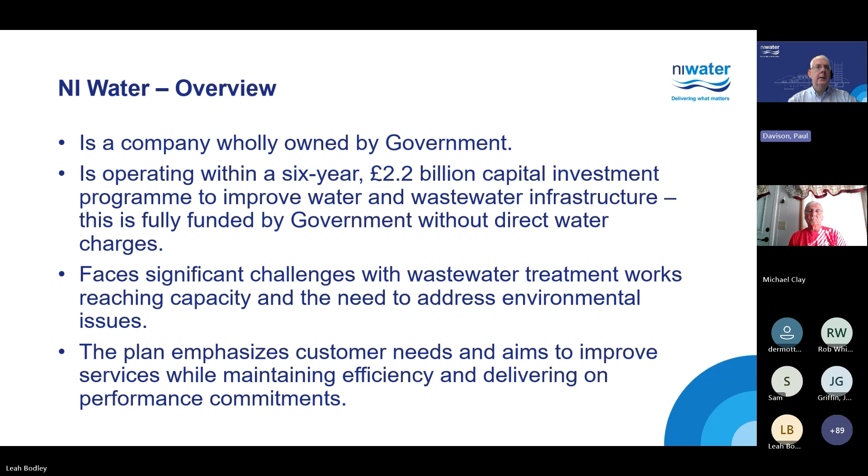Okay, I can see my slides now just by moving myself. Anyway, sorry. Okay, good afternoon, everyone, and my name is Paul Davison from Northern Ireland Water. I'm Head of Wastewater Strategy. I suppose where we're coming from here is the major challenges that our industry is being hit with, economically, politically, and environmentally. And if we continue the way we've always done it, we will always just get what we've always got. So we have to think outside the box, and we need a paradigm shift in our industry to be able to deal with all of these political, economic, and environmental challenges that we're having.

So Northern Ireland Water is a wholly owned company owned by the government. It has a 6-year investment plan, very similar to the investment plans in England and Wales. At the minute, we're going through our PC21 plan, which is a 2.2 billion pound investment in water and wastewater infrastructure. All of our funding is coming via government, so we have no water charges.

So we face very significant challenges from wastewater treatment, capacity, and also addressing environmental needs. Our ultimate objective here is to be able to improve the service while maintaining efficiency and delivering on the performance commitments.

In terms of wastewater treatment, we're looking for compliance within the regulated Water Order Consent, and that's mainly sanitary, but also bringing in flow compliance into that as well. We also then have got a capacity issue that a number of our treatment works are over their headroom, and to meet growth, these works then are overloaded. We are limited in terms of capital expenditure, CapEx, and we're also constrained in terms of our OpEx, our operational costs. We also then have very challenging carbon footprint challenges as well. And we're looking to see, can we reduce the transportation and disposal of sludge from our wastewater treatment works, as one of our incinerators is coming near the end of its working life.

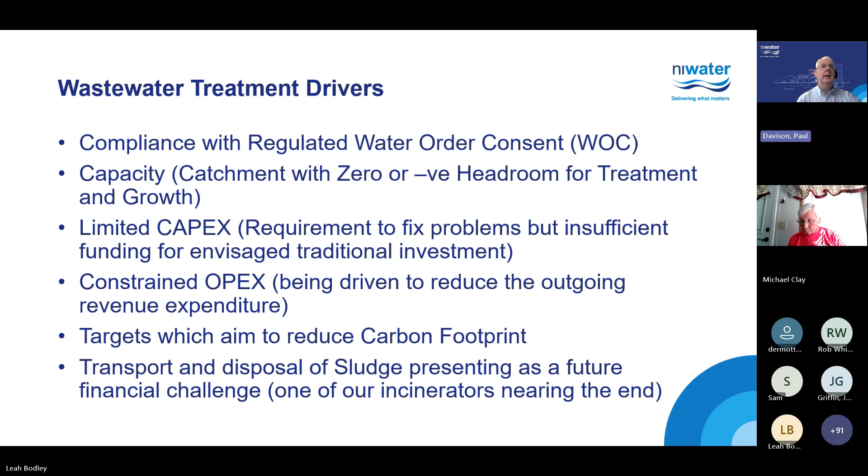So the knowledge sharing that we would like to try and achieve here is to be involved in new and innovative processes in the industry to be able to meet the challenges and the constraints going forward. In the past, and we're presently doing this, we're optimizing the physical aspects of a wastewater treatment works, and we have saw some benefits from that. What we're looking now, we're working with the ABS team, can we optimize the biology of a wastewater treatment works and then see further improvements in the performance of that asset. The ABS team will be able to give more details on how they've been able to achieve that working with Northern Ireland Water.

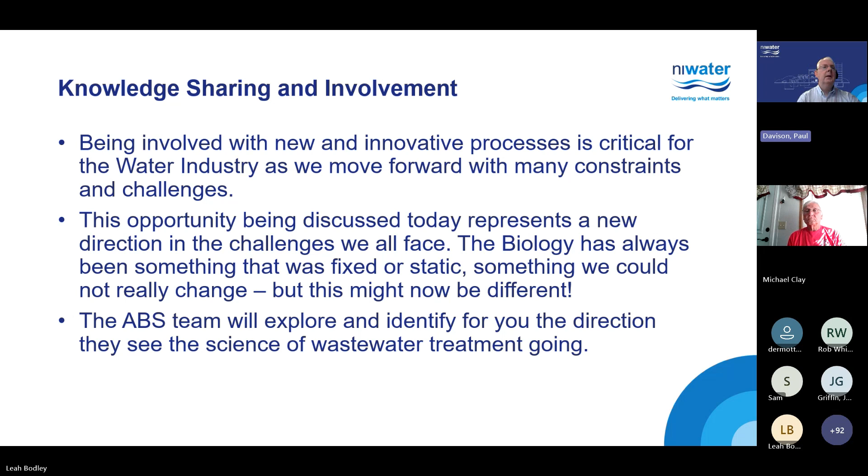Okay, so one of the areas that we've been working with ABS is on our sludge production, and maybe Northern Ireland Water is slightly different to the rest of the UK, in that we don't do any biomethane production, so no anaerobic digesters in any of our facilities.

All of our sludge is thickened, dewatered, and transported to two incinerators in Belfast, where it is burned. So we're looking to see if there's any way we can reduce the quantity of sludge we're producing, so we've got less cost in terms of dewatering, thickening, less transport costs, and less combustion costs of burning that waste as well.

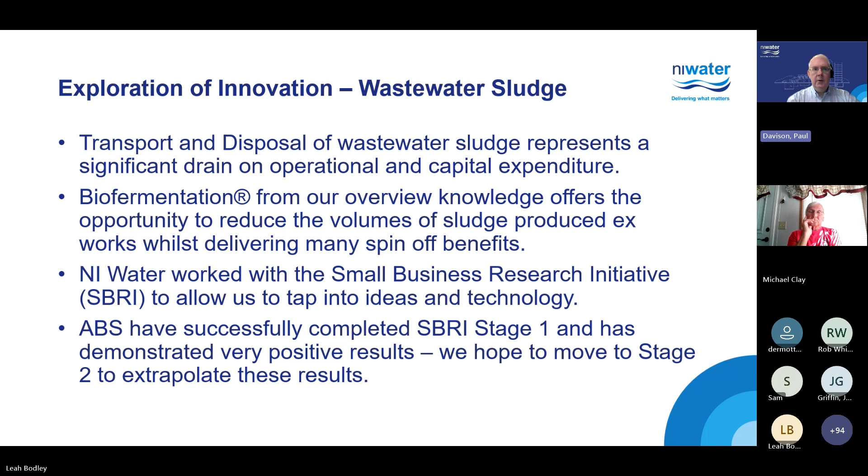Through the SBRI initiative, that's a small business research initiative, we've been able to tap into some of these ideas. ABS were successful in completing stage 1 of that approach and have demonstrated very positive results in terms of sludge reduction, and we are in the process of seeking further investment to take this to stage 2 implementation.

I think that's the end of my slides, and now I'll hand over to John Griffin, who will go into more detail on some of the work we've done with ABS in the past. Thank you, Paul.

Thank you, Paul. I'm John Griffin, and I'm currently one of the project sponsors in Northern Ireland Water, responsible at the moment for sewage and wastewater pumping station upgrades. However, in a previous role, I was responsible for managing Dungannon Wastewater Treatment Works emergency measures, which was our first experience of working with ABS and of biofermentation in particular. I was also the project manager for the biofermentation pilot project.

Dungannon Wastewater Treatment Works was designed for an original population of 65,000, and approximately 60% of its influent is from trade sources. In fact, the largest trader on their own accounts for over 30% of the plant's loading. The three largest traders are all meat producers. So as you can expect, this can have a significant impact on the loading of the plant, even though they have pre-treatment.

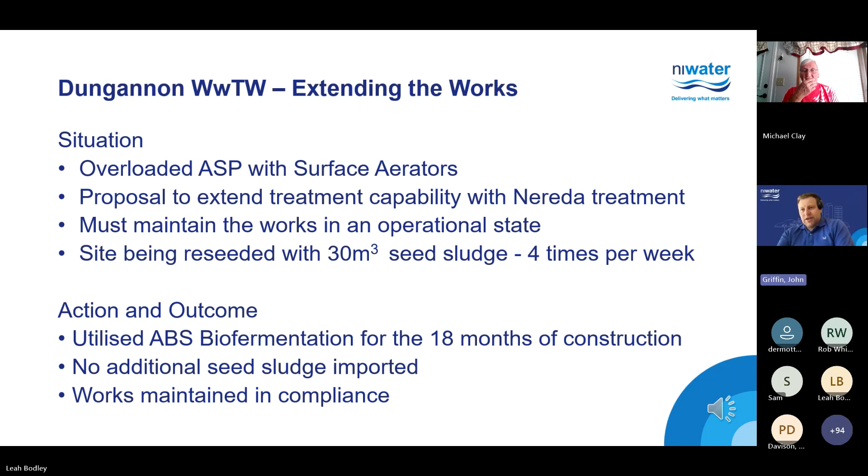In order to bring the works back online, we looked at a plethora of options, one of which was biofermentation. Ultimately, we knew we needed to provide significant additional secondary treatment, and we decided that Nereda was our preferred solution for the long term. So we brought ABS on board with an 18-month contract to provide us with biofermentation. During that period, we did not bring any additional seed sludge in from other sites, and we were able to return the works to compliance, particularly with ammonia.

The trial at Dungannon was part of a significant number of changes which all occurred at the same time, but we needed to do all of them to bring the works into compliance. We knew that biofermentation had contributed something to turning the works around, but we did not know the extent.

So, seeing the potential for this technology, we conducted a full pilot project and selected 5 sites. Omagh was an activated sludge plant having sludge management problems due to imports. Moy, an oxidation ditch with no storm management but, similar to Dungannon, had significant trade loading - in this case from apple processing. Killygonlan was a package aeration plant with no storm management and suffering from high infiltration.

Fivemiletown was a rotating biological contactor which suffered from rogue trade with very high biological content. Lastly, Limavady, which was a relatively new plant with no issues, was our base site, our control works. However, there was maintenance carried out on one of the lanes while we were completing the project.

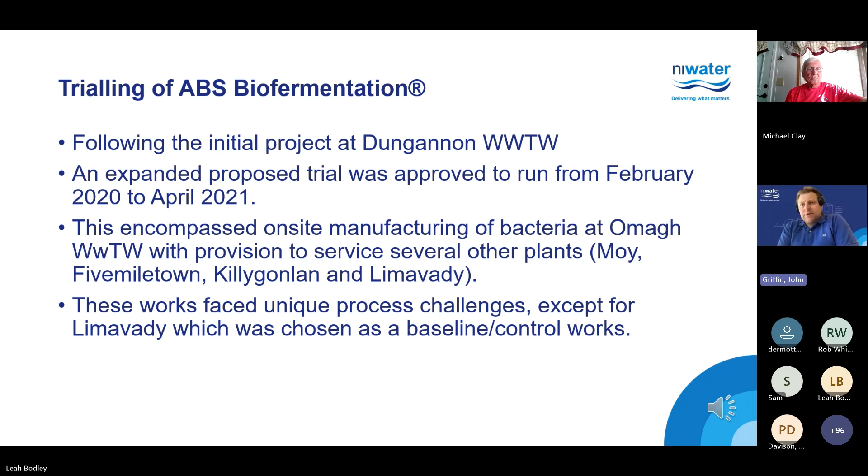We noticed a significant improvement across all sites. Killygonlan was still subject to high flows, but its recovery was a lot faster after washout than it would have been without biofermentation. Fivemiletown was our biggest surprise - biofermentation provided an unequivocal improvement on the performance of the works.

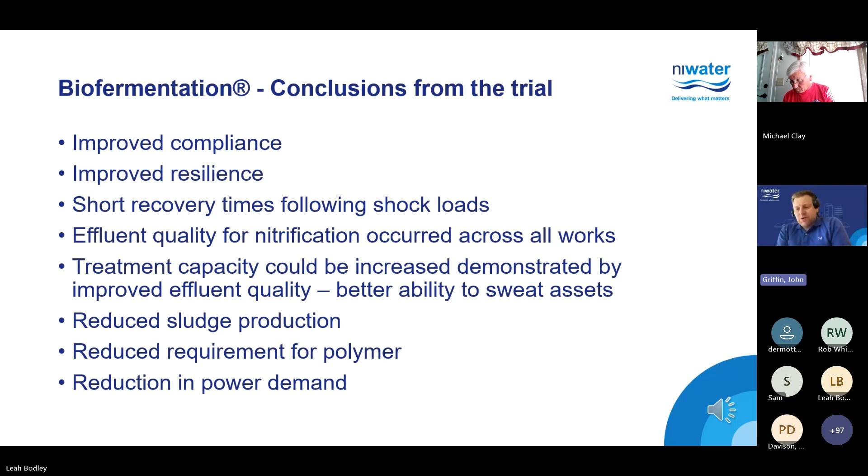Overall, we noticed improved compliance and more resilience. We had works that could recover quicker from shock loads. We used less power, had less sludge production, and less chemical use. Overall, we noticed that the effluent on all sites was excellent, and that the biological performance was to a nitrification quality.

As it was a pilot project, a report was produced and signed off by the head of scientific services within Northern Ireland Water and myself. We wouldn't have put our names to it if we weren't happy to endorse it, and we are very happy to share it with other companies within the UK water industry.

But going forward, we know we need to do a trial at a larger works. We need to get more data so that we can do a more detailed cost benefit analysis to work out the economics. Both of the projects we did were provided under CapEx with no OpEx. We need to work out a methodology which is available for CapEx to provide the plant and ensure that we've got the operational capital to be able to run it.

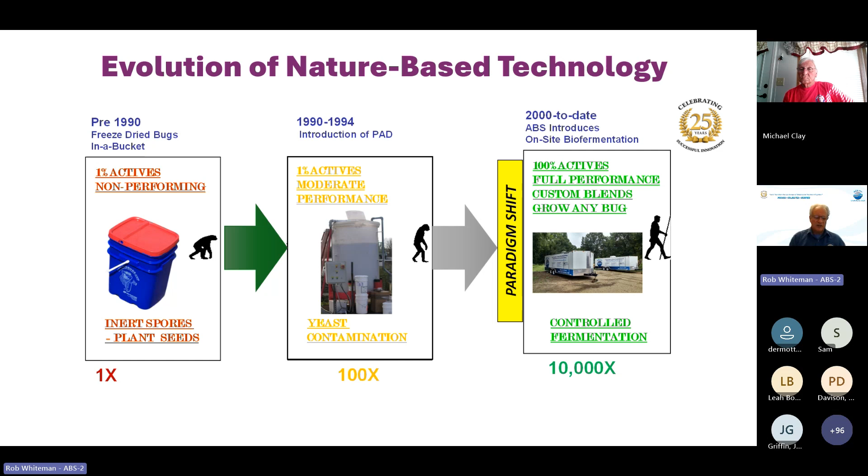Eventually, around 2000, we were troubleshooting a plant suffering from filamentous bulking in the pulp and paper industry, and biofermentation was born. This grows the microbes on site, delivering 100% actives, full performance. We can make custom blends, grow any microbe, and provide controlled fermentation, allowing us to deliver 10,000 times more than previously possible into the existing plant. This has allowed us to create a microbial population shift in the biology, which has created a paradigm shift in our thinking.

So if we look at the generations in the last 25 years, you may have noticed in the top right, we are celebrating 25 years of successful innovation in technology. We started out in industrial, filing our first patents on the process, and were able to get compliance within 10 days on plants treating 160 megaliters a day, or 40 million gallons a day for Americans. The second generation was around 2007, 2008. We started exploring the municipal sector in the United States to control filamentous bulking and noticed reduced sludge production. That's when we first went to the City of Dublin and started working with them.

The third generation, we worked with Carl Gerald at Stark, where we'd already demonstrated sludge reduction in the aeration basin, getting results of 60 to 70% reduction. Carl asked us, could we work in his aerobic digester? We said, we don't know. We tried it and it worked. Carl went about 5 years without hauling sludge, and we have another client that's gone 6 years now.

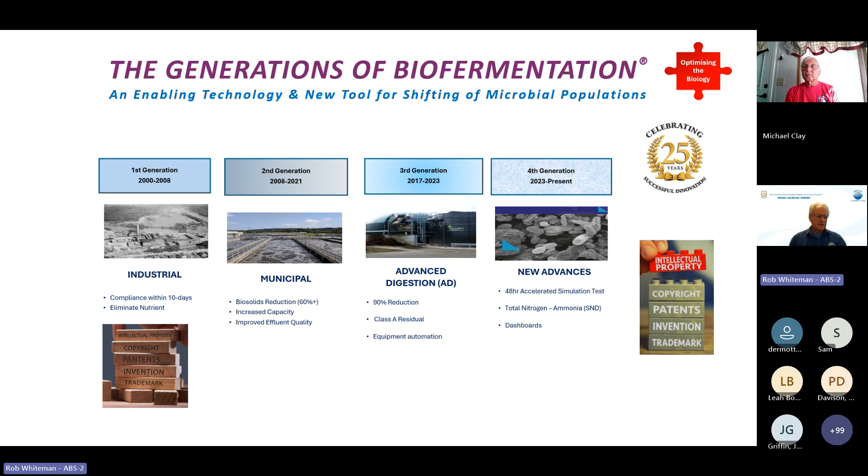Then the fourth generation, in the last couple of years, we developed the accelerated simulation test, which can demonstrate improved settleability, and I'll show you an example of that, and expanded our patent portfolio. So that is the generations of biofermentation over the last 25 years.

So why would you grow organisms on the outside of a plant and not try to grow them on the inside? Well, if you look at environmental engineering, the whole basis of our training is to grow the microbiology in situ. And this creates a disconnect between environmental engineering and microbiology.

Basically, in situ growth, we drive the mass, so we increase the mass through increased activity. This creates undesirable byproducts, poor settleability, because as we drive the mass, we increase our solids retention time or mean cell residence time. By growing the microbes ex situ, we can deliver a huge amount of viability of non-pathogenic bacteria, which allows us to drive floc structure, non-filamentous material, improve settleability, and improve activity.

And again, mass is not necessarily driving viability. It is simply driving activity by increasing the mass. So we're actually able to get a lot more activity by driving viability of the biomass.

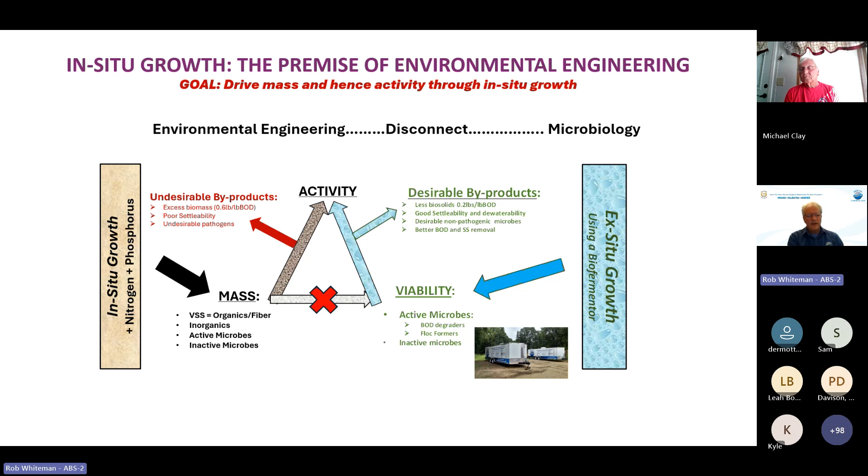So why do we need probiotics? Bottom left, we see Eikelboom, who was one of the people that really started to study the microbiology on the scope and came up with a filamentous ID grid. And this was followed by David Jenkins in the United States, who also did the same over here.

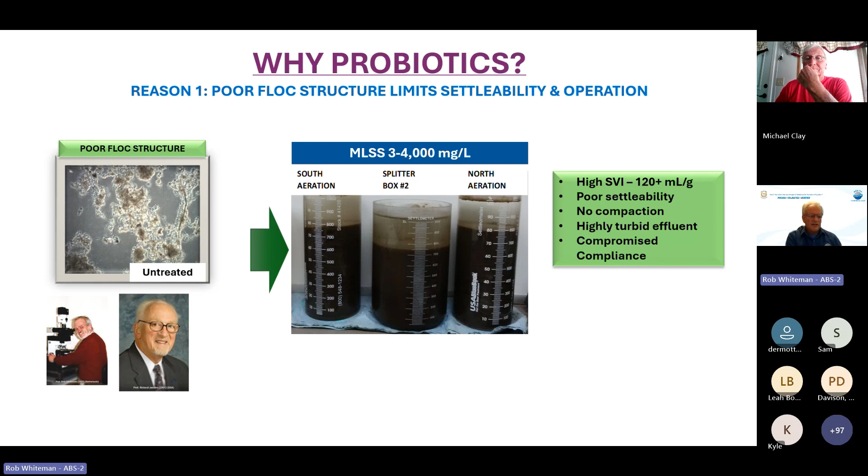And what we see in that slide is basically poor, open, weak floc structure with some filaments. Basically, this leads to poor settleability and operational challenges in a system. So this leads to high SVI, sludge volume index, which can be greater than 120, poor settleability, no compaction, high effluent turbidity, and basically compromised compliance because we have small fines going out in the effluent.

So how does it limit the operation? Basically, poor settleability. The operator has a choice. He can either lower his mixed liquor so that he can get better settleability because there's less solids in solution, or as environmental engineers, we would look at the system and say, well, it doesn't have enough clarifier capacity. Let's build some more clarifiers, and that adds CapEx and OpEx. And by the way, when the operator lowers his mixed liquor, he's creating higher OpEx because we're wasting more out of the existing plant.

The alternative solution is to look at using probiotics to create a microbial population shift, allowing a longer mean cell residence time.

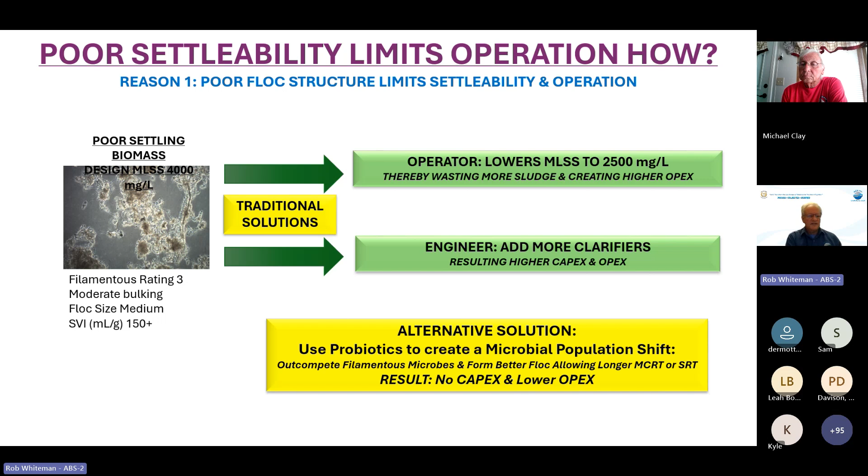The other thing is cleaners and household detergents weren't around before the 1930s. And since COVID, hand sanitizers have come in. So if you go back to the original paper of Ardern and Lockett, they actually talk about sieving the sludge through a metal sieve, not through a 1.5 micron filter paper, which indicates that the sludge size was probably quite a bit bigger. And I think that over the last 100 years, if we had the data, we'd find that the settleability and floc structure has been seriously compromised by the kind of wastewater that we now have. And of course, all these are now becoming emerging contaminants of concern.

Reason 3, aging of the sludge decreases the viability. It's like making an old people's home. Here on the left, we see trailers that typically our biofermentation units come in, and these are called Model 1500s. On the right is the typical floc structure.

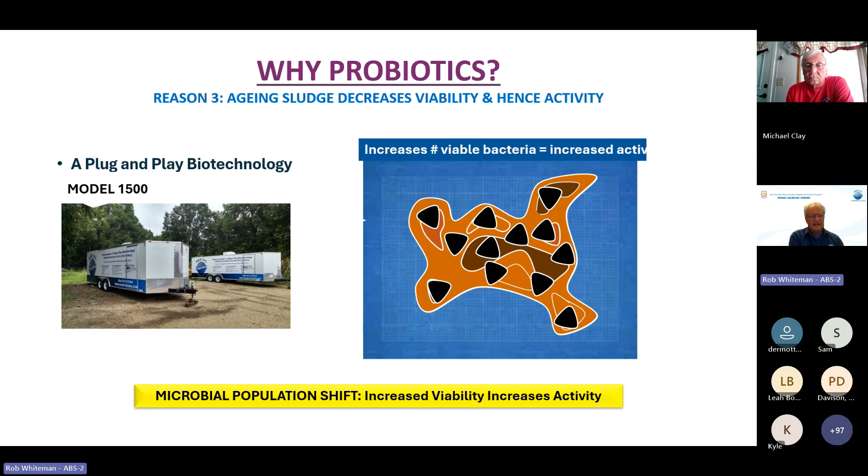So what is the impact on activated sludge? Well, we put the biofermentation system online as a full turnkey service. First thing we're going to see is improved settleability and compaction and a reduction in the filamentous. The impact of that is to improve the effluent quality, as John talked about, that he's seen in his projects in Northern Ireland, ensuring compliance.

Third thing is, if the operator wishes, he can then start to increase his mass to increase his process capacity. And then the fourth thing is, the better settling sludge, the more hydraulics you can get through the works, particularly a secondary treatment system, assuming there's no piping limitations.

Then you see improved dewaterability, reduced polymer usage. You see a reduction in the amount of solids produced, usually by about 30% if it's not optimized, up to 60 or 70%, and the operator controls that process. Finally, we have also noticed about a 25% reduction in electrical usage where VFDs and diffused air are used.

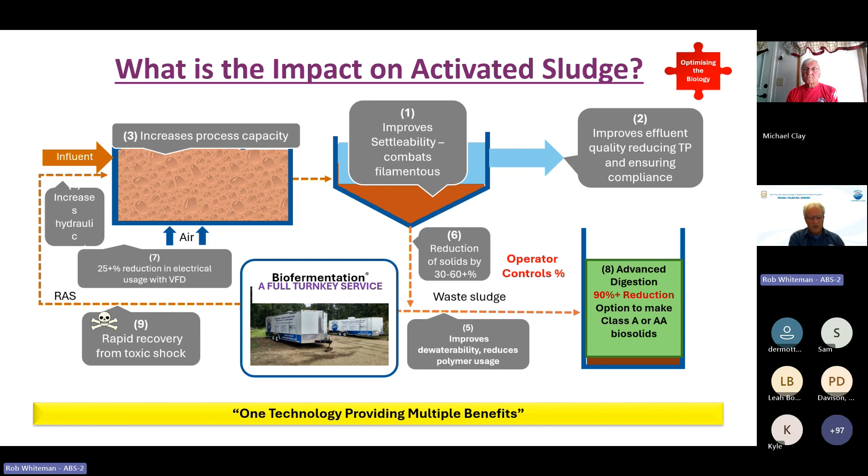And then finally, what we mentioned earlier, development of the process of advanced digestion to continue digesting the sludge further. And we've seen the ability to reduce the sludge make by 90% and also make what's called a Class A or AA biosolids in the United States, which is a low pathogen sludge. And then finally, what it was developed for originally, which was rapid recovery from toxic shock. And you can't separate out any of these benefits. If the technology is applied, you get all of these benefits by optimizing the biology.

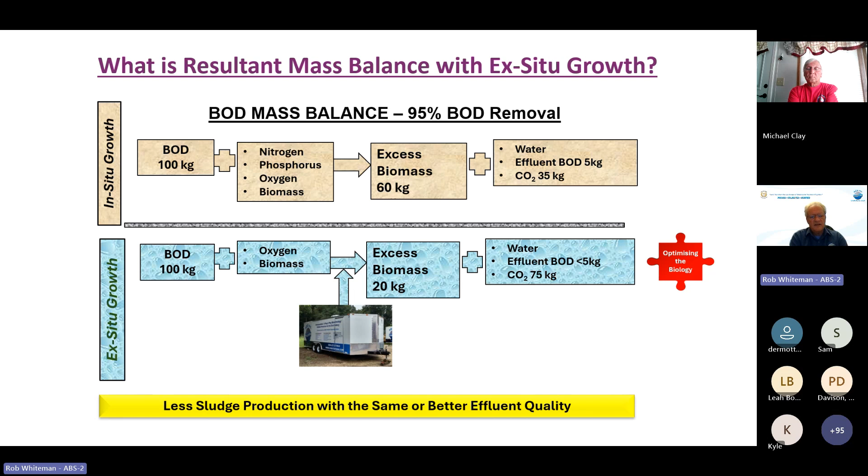So if we look at the mass balance for a plant that's doing 95% BOD removal, for every 100 kilos of BOD going in, you provide nitrogen, phosphorus, oxygen, and biomass to start the reaction. We get about 60 kilos of excess biomass from that plant, 5 kilos in the effluent, the rest goes to CO2. If we use ex situ growth we see that drop to about 20 kilos of excess biomass, less than 5 kilos of effluent BOD, with the balance going to carbon dioxide.

So why would we even consider this process? Well, pollution prevention hierarchy by DEFRA or EPA, they're both the same, with respect to sludge disposal, requires us as environmental stewards to look at source reduction. However, the industry has been very focused on disposal methods, landfill, pelletization, incineration, volume and mass reduction through aerobic or anaerobic digestion, energy recovery through anaerobic digestion, and beneficial reuse on land application.

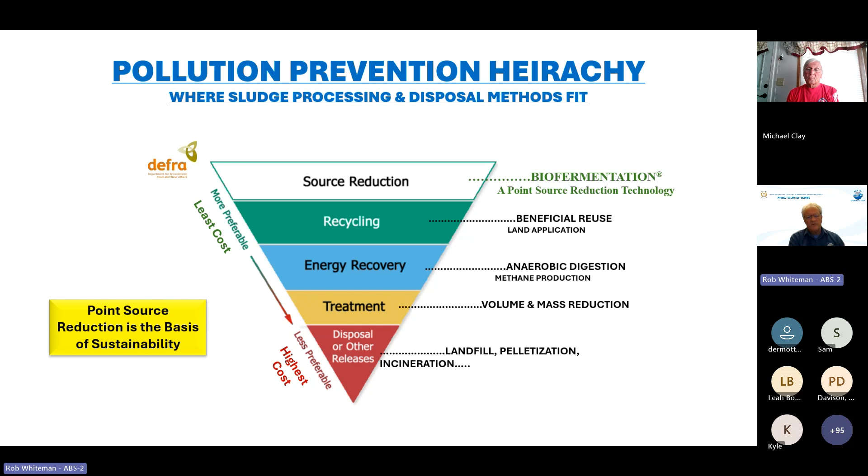But biofermentation is really the only point source reduction technology, which is what we call it. And that is the basis of sustainability for any kind of program moving forward. We have to look at source reduction technology.

In terms of the evidence of cause and effects of probiotics on a waste treatment plant, this is part of a 5-year study from Port St. Lucie. The blue dots are before and the black dots are during the use of the probiotics. And this is food to microorganism ratio on the x-axis versus kilos of sludge produced per kilo of BOD removed to normalize the data. And you see that it doesn't matter where we operate on the F/M curve, because a lot of engineers criticized us because we would increase the mixed liquor. And so they argued we would change the F/M and therefore not really reduce biosludge make. If you look at the data, we determined that that was not true during the study.

And if you look at the R squared around the fitted curve on these graphs, R squared means how closely it fits to that curve. With biofermentation, we had an R squared shift to 0.96, which I'd never seen in wastewater. That basically means you can rely on the fitted curve plus or minus 4% or so in your accuracy, which allows engineers to design things more accurately, whereas with the blue dots before, the accuracy was only about 0.45, which would be about plus or minus 55%. And sludge reduction occurred irrespective of the actual F/M. And we've seen since that biofermentation always improves the R squared.

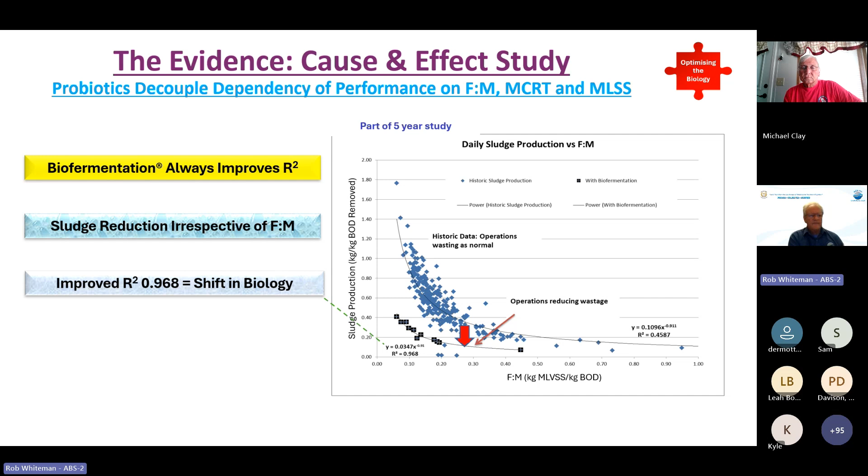So if we look at classical sludge processing and the net zero carbon challenge for the UK, a lot of plants have primary sludge make, etc. And sludge production, as mentioned earlier, is 0.6 kilos per kilo BOD removed. Although I noticed I've still got pounds in here.

We have all sorts of methods of decreasing that mass initially, either through anaerobic digestion or aerobic digestion. A problem with anaerobic digestion is we're finding we get return filtrate that's high in ammonia and phosphorus back to the front end of the plant, and then we have to treat that all over again. We're recovering about 50% of the methane in terms of energy recovery before we go to volume reduction using either presses or centrifuges.

And then if we look at disposal methods, we have options of land application, landfill, which is certainly very expensive in the United States. I'm sure it's very expensive in the UK. Incineration, which is costly in terms of capital. And we're looking heavily here at composting and pelletization to sell sludge into the consumer market.

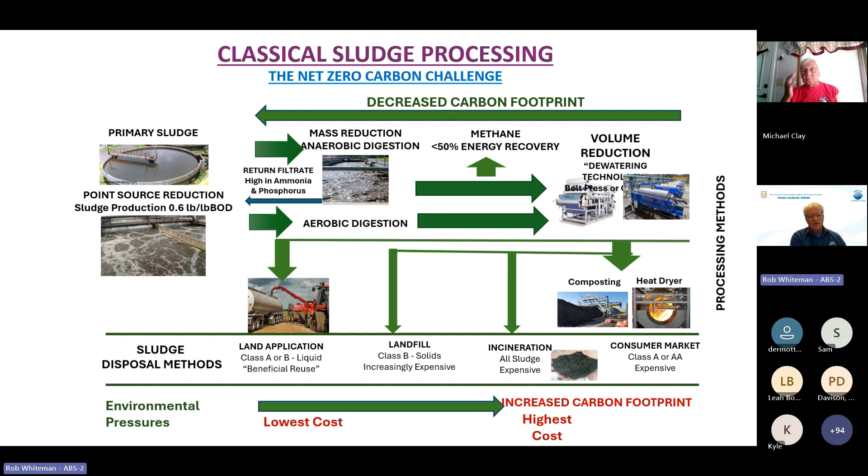But the reality is there's so much sludge to be dealt with, not all these disposal methods can handle it. And each one of them, as we go forth into incineration, etc., all increase the carbon footprint and all increase the cost. So with a paradigm shift in thinking, what happens if we took the ultimate system and optimized the biology?

First of all, we would probably convert the primary clarifiers to anoxic or anaerobic zones so we could get total nitrogen removal. We would treat the aeration basin going to 0.2 instead of 0.6 pounds or kilos, whichever you want, per kilo or pound of BOD removed. That would have a serious effect on all the downstream processing equipment and requirement for that.

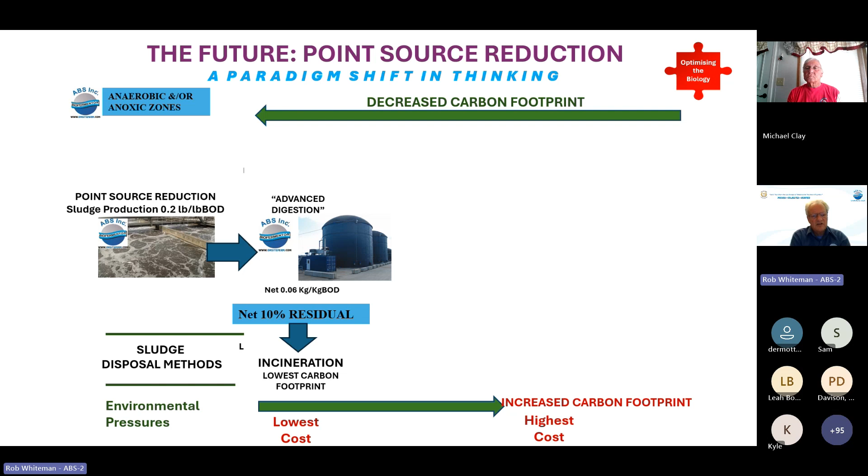And if we added advanced digestion, where we could actually get a net 10% residual by removing 90% of the sludge completely, incineration would become a lot more cost effective. And in fact, this whole process would decrease the carbon footprint while providing the lowest cost alternative to handling sludge.

So how do probiotics help the engineer? Well, basically, it's enabling technology, allowing a process shift in the microbial population that's not been possible before, which results in reducing cost. Basically, the biology has been unpredictable and unreliable, and we've used management control tools such as engineering design, operational changes, environmental drivers, or mechanical upgrades to try to control the biology in the past.

But now with this technology, it's possible to optimize the biology and shift it to an optimized place where we can really just get more out of the works and sweat the assets, which I know has been a big thing in the UK. But this creates a paradigm shift in our thinking and the way that we approach wastewater treatment and the way that we look at trying to solve problems.

Determining performance, financial benefits, the way that we work is we normally present the technology. We'll do a risk assessment that includes biomass health, data analysis of operational data to ensure valid baseline data is available, financial evaluation ensuring financial benefits are going to be there.

And with this accelerated simulation test that I'll show you in a few minutes, demonstrating improvement in settleability with activated sludge plants. And another key component during the risk assessment is onboarding operations and defining the operational limitations up front so that we can all work together to optimize the plant and its performance.

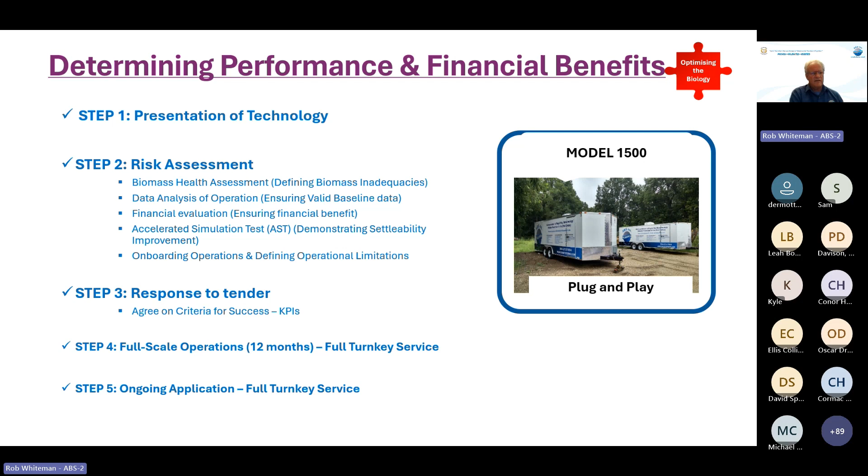Let me just show you this. This is our advanced accelerated simulation test. This is an example from Dunmurry. And while that's just settling, on the left is the treated, on the right is the untreated. Basically, we have dosed the one on the left with the probiotics. The untreated is undosed, and what we see is about a 37% improvement in the sludge volume index.

But more importantly, if you look at peak settling rate, we actually improve the peak settling rate by about 70%. And this is just a batch test that we've done to try to simulate something without actually having to go to the field with very expensive equipment and putting a lot of personnel in place to run the project.

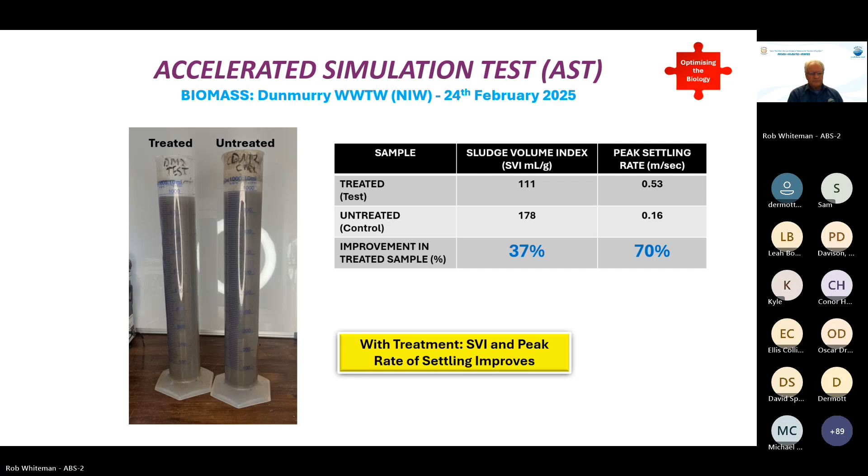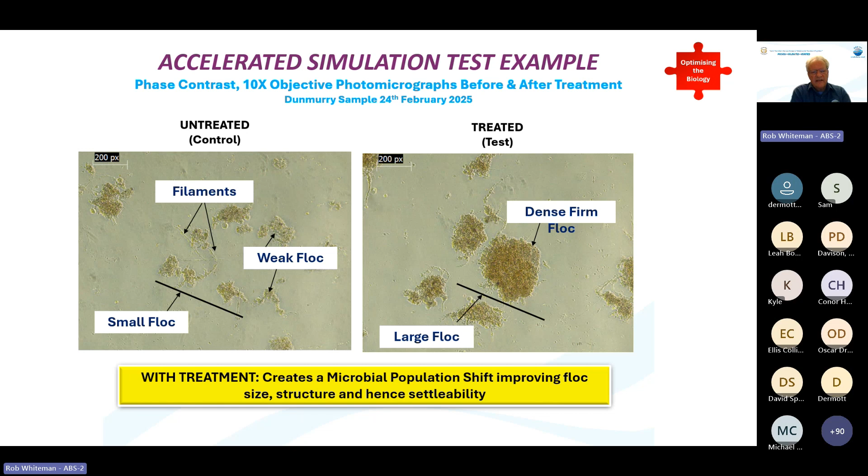So what are the applications that we're looking at in municipal? Basically, improve compliance. We believe that this can all be done in 90 days of starting a project. Increased headroom, 25% or so, allowing more hydraulic throughput capacity as well, maybe in the region of 50%. Reduced sludge production, up to 60%.

Reduced energy usage and carbon footprint, reduced total nitrogen. We're working on that right now, and we have a number of case studies showing reduced total nitrogen here. We've also worked on algae control, and our future applications include biological phosphorus removal. We're also working on simultaneous nitrification, denitrification at present, and potentially biofertilizers.

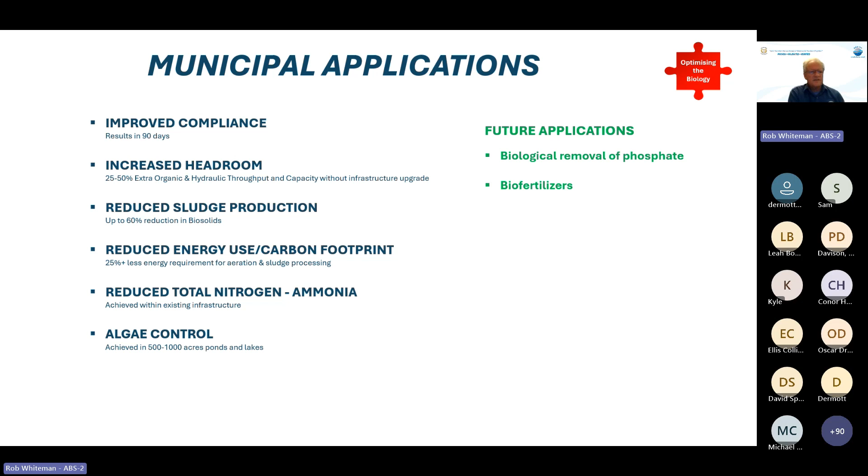How's this thing scaled? Basically, because we provide it as a no-hassle, full turnkey service, the client enjoys the results. The scaling is not really a problem. We currently have 3 units in the UK capable of treating between 300 and 800,000 PE.

We're looking to assign one of these units per water company. Delivery can be within 4 weeks. We just require utilities, 400 volt, 3-phase, around 100 amp. And depending on how much we're dosing, 20,000 liters a day. We need a footprint, obviously, to put a container, as most of the units there are containerized, apart from one

which is still trailerized. And then we can get results in 30 to 90 days after the initial inoculation, which can take anywhere between 1 to 4 weeks. And if additional equipment is required, we can look at lead times at that point. But frankly, scaling a water PLC across its whole region would probably take maybe 5 years, I would think, at the outside, to 6 years, somewhere in that kind of range.

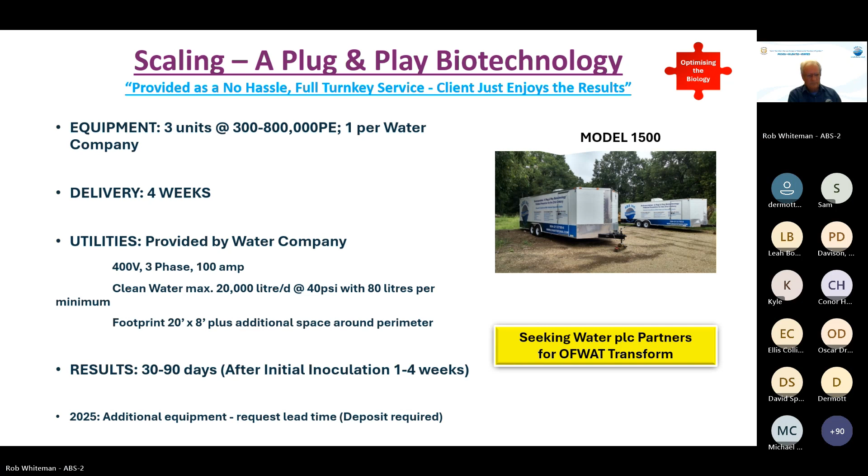We are seeking water PLC partners for the Ofwat transform to scale up and get more cost benefit data around the technology. With that, I will go into the next section, which is talking about some of the data that we've received, and I'll do it by section. So this is on compliance. We have rapid compliance with long-term resilience. We believe that we can probably put 90% of the plants back in compliance in 90 days. That's quite a claim, but we have the data to back it up.

I'm going to show one example outside the municipal sector. This is from the pulp and paper industry, where we started, simply because this shows rapid compliance. Pulp and paper mills often have toxicity. In this particular case, we weren't adding any nutrient, so the growth in situ was only dependent on what we added to the system. There was toxicity, and it had limited aeration and hydraulic retention time. Both were compromised by about 40%. And this shows one-day BODs.

We mobilized our Model 1500 trailer, and upon dosing, we started to see a rapid decline in the final effluent BOD1s going out, with about a 67% improvement over that period of time. This allowed the mill not to have to shut down its operation in order to maintain compliance, which is a very big deal for industrial plants. But this is one of the best examples we've got of rapid recovery. It literally can happen immediately.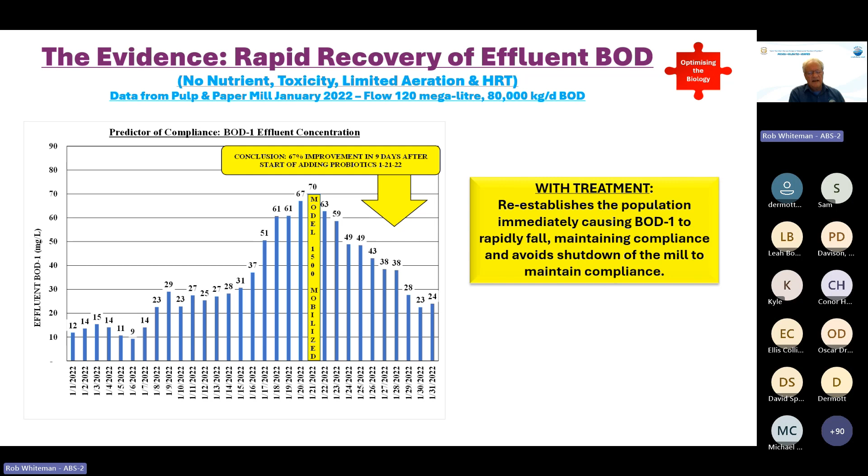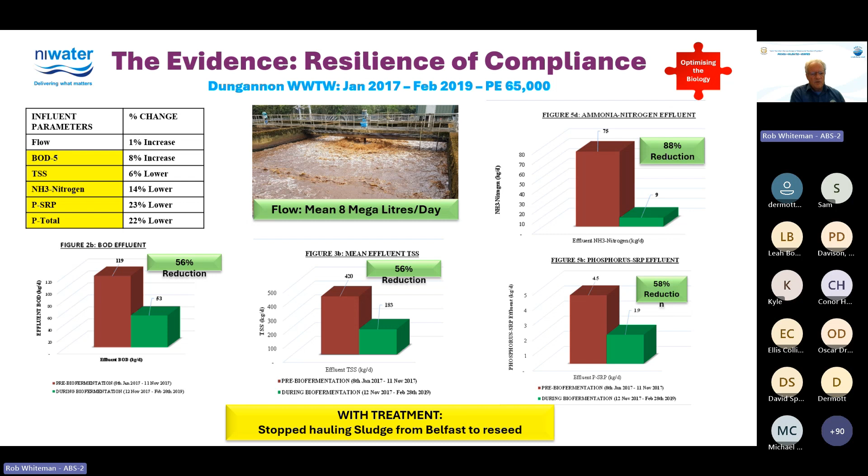Even with that, we saw a major reduction in the effluent BOD of about 56%. Suspended solids were down 56%. We saw a massive drop in ammonia of around about 88%, and that's because we could keep the sludge in the system. And phosphorus actually went down by 58%, and the actual ferric usage went down by about 33% at this particular plant. There are a lot of other things. I could probably talk for about another 30 minutes on the other things that happened here, but I just want to give you some high-level data in this particular presentation. So they also stopped hauling sludge in from Belfast to reseed.

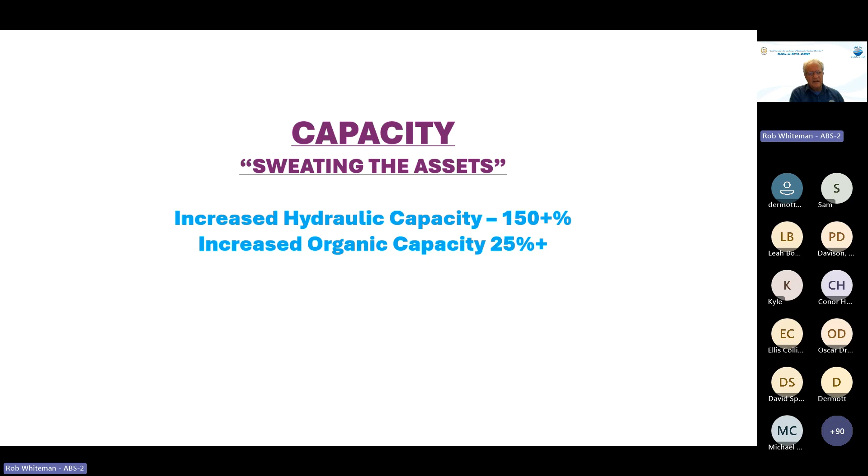If we look at capacity, sweating the assets, we feel confident that the capacity could take 150% more hydraulics through the same plant if we can improve settleability substantially, which we showed through the accelerated stimulation test. And once we can improve settleability, we can increase organic capacity by being able to hold some more sludge.

This is from what John described as their control plant in the second study, with a population equivalent of about 16,200 or so. The flow was about the same, but during the period of treatment, the BOD actually increased by about 40%. We think that people were staying at home more because of COVID. What we see in this particular case, and this was an oxidation ditch dual train with 2 clarifiers, no primaries, we see the effluent BOD going down 33% on average, suspended solids 25%, and ammonia 27%. These are actually in milligrams per liter, and the ones I'll show you later on some of the other plants are in kilograms a day.

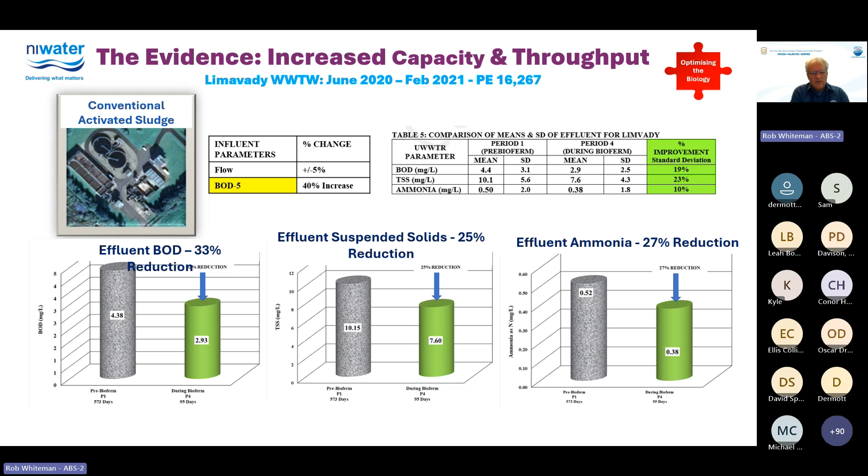But we did a statistical analysis to look at the standard deviation and the final effluent before and after. And what we see in every case, and this is not isolated, we've seen it on all our other data too, is an improvement in the standard deviation of the final effluent. What does that mean? What that means is that it gives you more reliable effluent quality. There are fewer flyers. So that means that your BOD is more consistently in permit, and your TSS and your ammonia, than it would be without the use of probiotics.

If we look at Fivemiletown, which was an RBC, this had a population of about 2,800. There were 4 RBCs here. It had a discharge from a bakery that was loaded with fats, oils, and grease.

What we see over the treated and untreated periods is a 47% reduction in BOD, 48% in suspended solids, and 38% in ammonia. Again, we see a significant improvement in that standard deviation highlighted in green, the top of the table on the right, showing much more stable effluent quality.

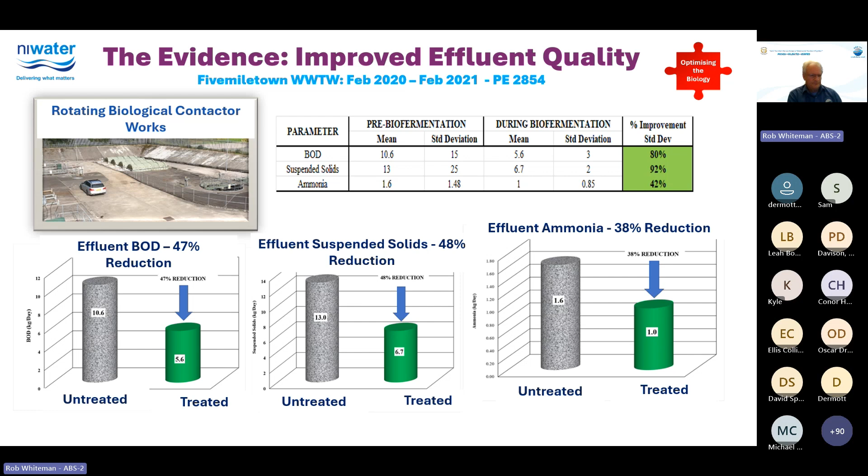Visually, this can be seen on the RBC disc very easily. Before we started, it was gray and anemic, covered in fats, oils, and grease, and the biology was basically suffocated by this. By introducing new biology, we're able to get the biodisc back to a healthy brown color.

When we pull out, and everybody always asks us what happens when we pull out, it returns to its normal state, which is what it was before we used the probiotics. They get washed out. You can see how in the last photograph, it has gone back to being gray again.

But even on an RBC, we see sludge reduction of about 12%.

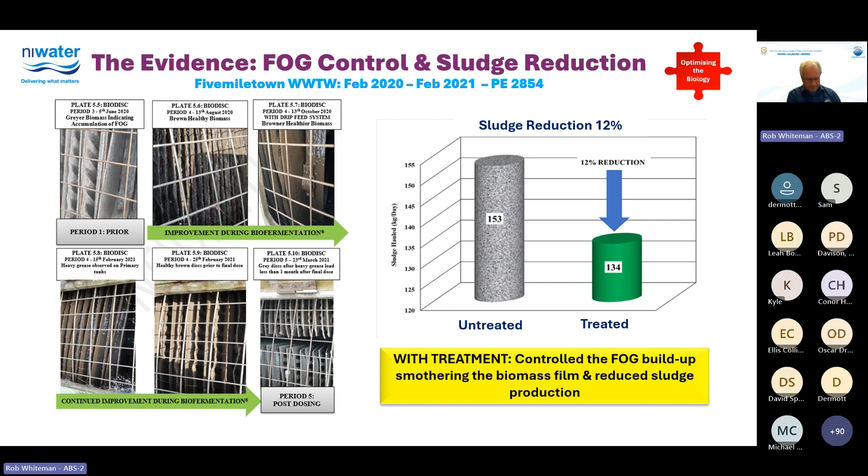What have we done on reducing energy? Aeration typically goes down about 25% with a variable frequency drive. There's also downstream reduction in energy usage for recycling and processing of sludge, but we have yet to measure that.

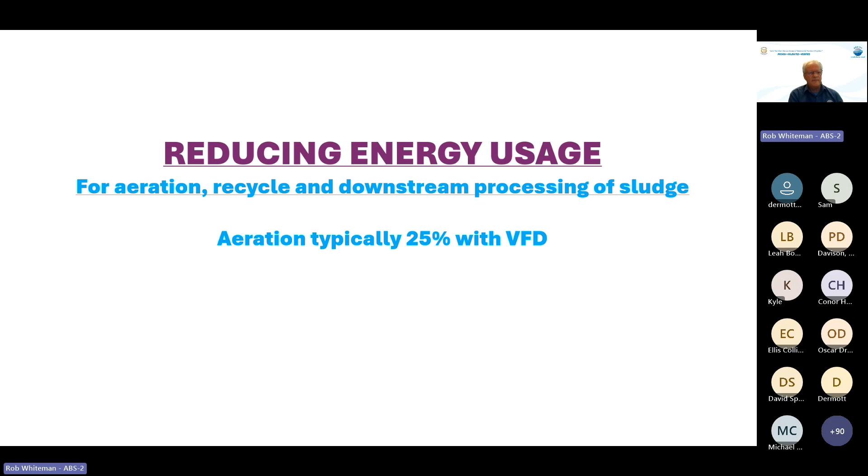This again is from Limavady, and the data supplied there. We saw a 25% reduction in energy, despite some slides I'll show you later where we actually saw a 44% reduction in sludge. So we're reducing sludge in the aeration basin while also reducing energy usage.

And that's because we believe we're actually transferring more oxygen into solution. Typically air is 21% oxygen. Off gases are typically 18%. This is something we want to measure in our next round of studies, but we believe we're getting probably 16 or 17% off gas, which would be almost doubling the transfer efficiency into the water.

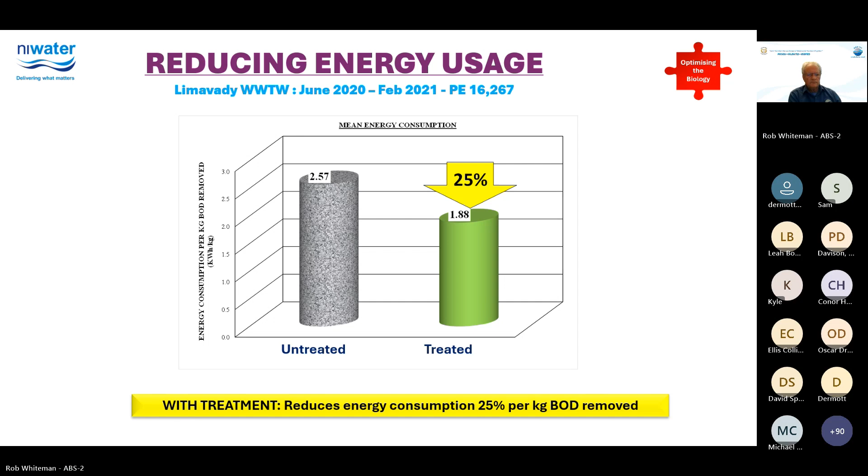Chemical reduction, important for reducing OPEX. I'm going to show you some data here from the City of Dublin.

Courtesy of Michael Clay, who's on the call today. We thank Michael for his participation here and also the support he has given ABS over the years since 2008. We've been at that plant now for 17 years.

We started just with the goal of reducing the alum usage. The plant has primary clarifiers, trickling filters, followed by an anaerobic digester to handle sludge, followed by belt press and disposal to landfill. The plant was a recycled water plant, and it was struggling to meet its NTU requirements and had become what Michael calls alum addicted.

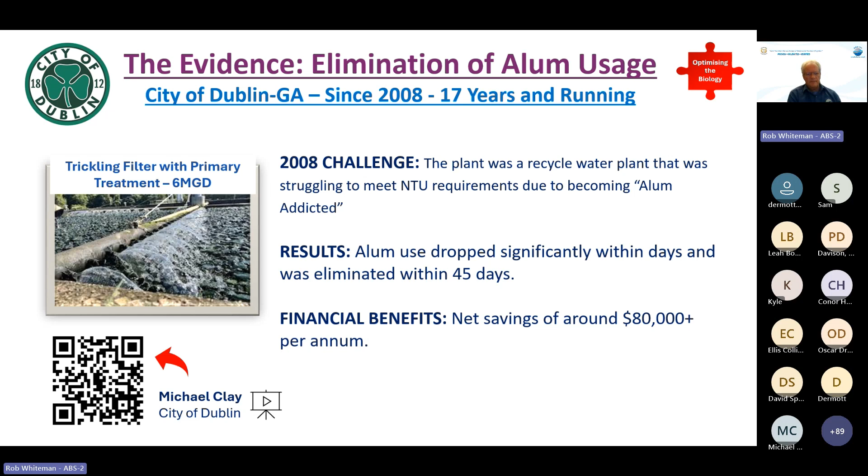Alum dropped off significantly within days and was eliminated within about 45 days or so. The financial benefits of that to the city were around 80,000 a year back in 2008. This allowed them to pay for the biofermentation program. Feel free to use Michael's QR code there to listen to his testimony.

Smaller carbon footprint. I was asked to touch on this because we really do affect carbon footprint. There's a tremendous amount to talk about. We thank Northern Ireland Water for the modeling of Paul Davison and a number of other people involved in the paper they wrote.

And we thank AECOM, formerly URS, for helping us build a model around the ABS equipment so that we could look at this. I want to thank Conor Hughes for actually putting this work together.

So if we looked at the impact of biofermentation increasing the capacity of a plant that was 14,500 PE, using the model that Paul Davison and Patty Brow had developed along with a lady from university I think called Smyth, then what we would see is that if we can increase that capacity 25% without pouring concrete, we get a net gain in embodied carbon footprint.

The carbon footprint of the biofermentation system itself is very small, about 1.84, versus several thousand, 2,400, for putting in a new system. The operational carbon footprint is about 0.17.

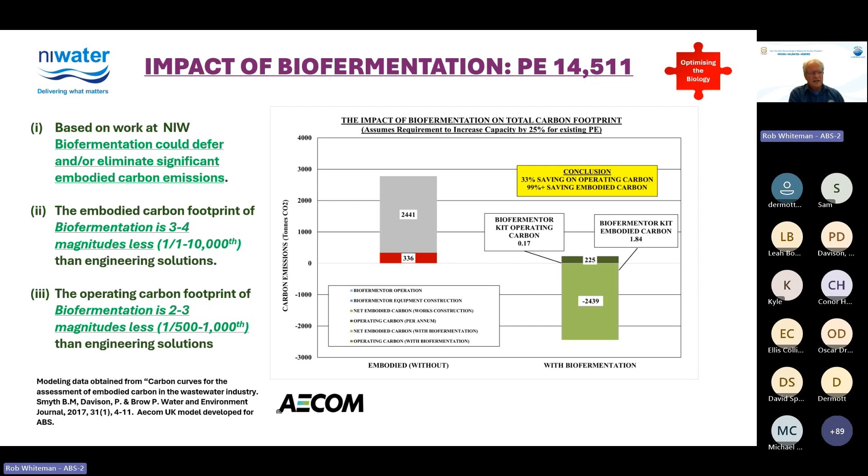We have yet to do any cost benefit analysis on this. I know that carbon charges have come and gone in the UK and maybe are coming back in - I haven't kept my finger on the pulse there. But I think moving towards the 2032 goals of net zero carbon, this technology could certainly lend its weight in that respect.

Looking at reducing sludge production, at a high level there are 3 phases. One is 30% reduction, which is unoptimized, where the operator doesn't change anything in the operation of the plant. The other is 60% through optimization, where the operator would increase his mix liquor as the settleability increased, reduce return rates, and take advantage of that improved settleability within the capacity of his system. And then finally, where you could couple this with the advanced digestion process we've now developed to get actually a 90% reduction.

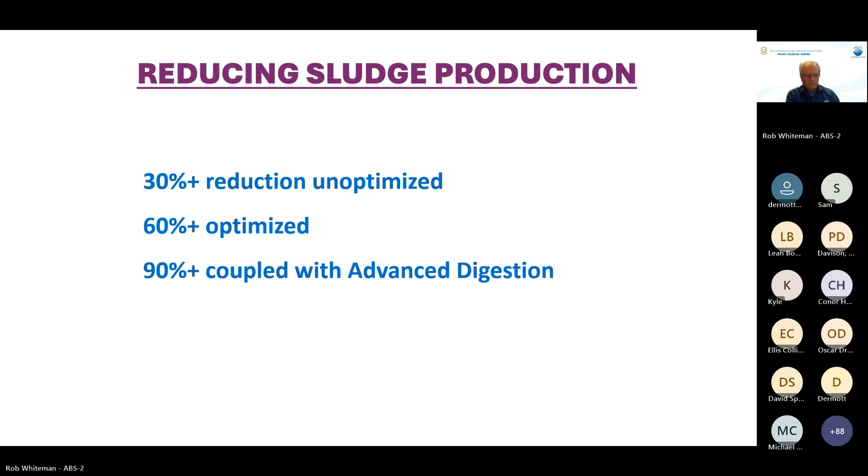So if we look at an unoptimized situation, this was at Limavady again, we see around about a 44% reduction here with no additional equipment and no additional energy.

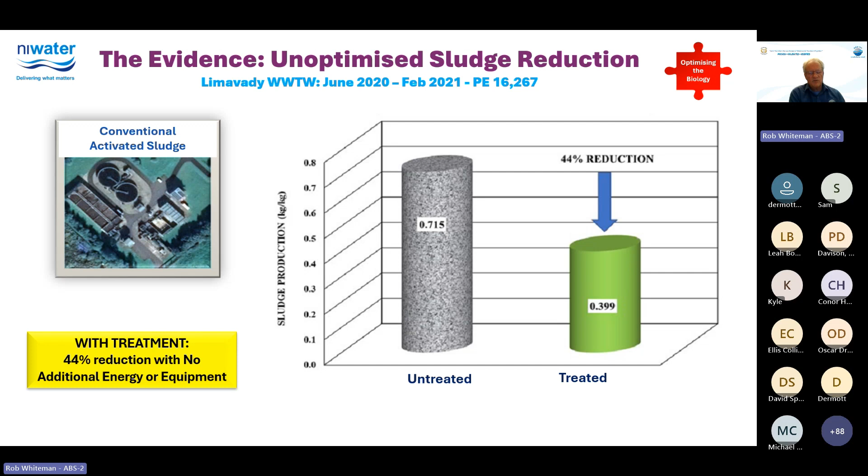That's really important. We didn't do anything, but just added probiotics to the waste treatment plant to improve its performance. If we go to the city of Dublin, this wasn't the original goal. Our original goal was to reduce alum, but over the last 17 years, we have seen a 70% reduction on average in the amount of sludge being hauled out of there. And that's with BODs actually being about 15% higher right now.

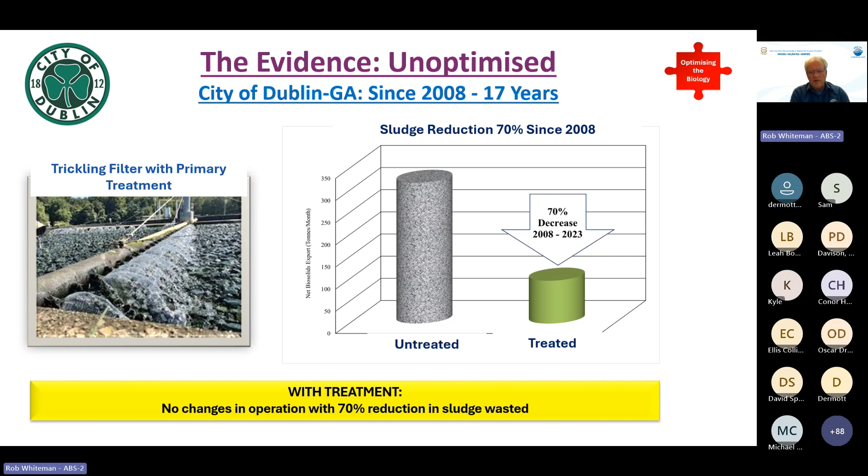So this is one of the side benefits that I mentioned. Whether you use biofermentation for compliance or increased capacity, you are going to get other benefits as well.

Coming to the work that we thank Kyle for at the city of Starke, we started there in 2016. This basically shows period 1, when the city was actually hauling liquid sludge pre-2010, and the data from that per kilo or pound of BOD removed. And then we see the maroon bar, which is when they installed a process called BCR to try to get a Class A sludge so it could be disposed of to land, which basically reduces the pathogen content using chemicals by swinging it between a high and low pH.

Kyle experienced operational issues with that, and we were called in through a series of relationships. His operator had worked with us before and asked Kyle to talk to us. He kindly did, and in June 2016 we started biofermentation.

Over a 5-year period, we saw a 54 to 70% reduction in the amount of sludge coming from the aeration basin, depending on whether you compare it to liquid hauling or the BCR process, which actually apparently increased the sludge make, probably because they required a RAS concentration of about 7,000 to go to their equipment because of some limitations there.

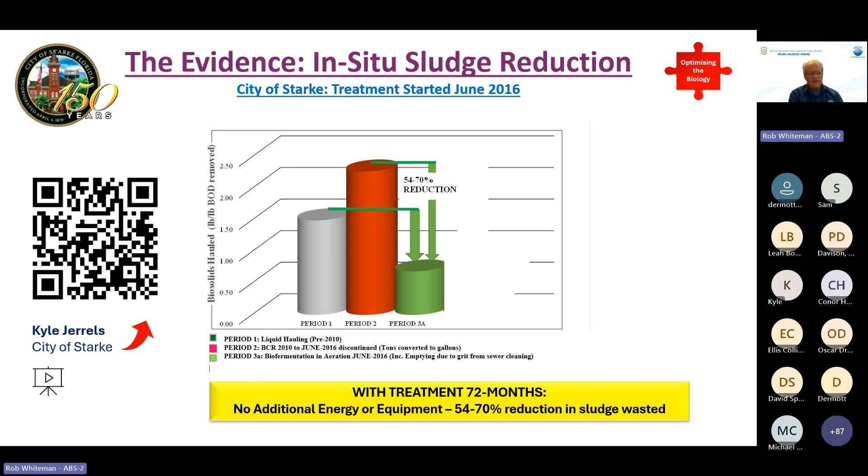If we then look at this, again it was done without any additional energy or equipment, reduction in sludge. Kyle asked us at the end of the first year, could we possibly continue the process in his digester? And I said to him, I have no clue, it's never been done before.

We worked together and started the process on his aerobic digester, dosing every month or as required when the viability dropped. We took it in and out of anoxic and aerobic states to get rid of the nitrogen content. We successfully went 5 years without hauling any sludge, apart from one time he had to haul some sludge because he had to do grit removal on his aeration tanks. I believe they just put that to the old drying beds because there was no rush to get it out of there. But there was no continuous hauling.

I think this represents around about a 90% reduction, and no disposal in 5 years. We actually used less energy because we only had the aerators on probably 4 days a week instead of 7 days a week, and no additional equipment. Kyle's video clip is there if you want to listen to what he's got to say about it.

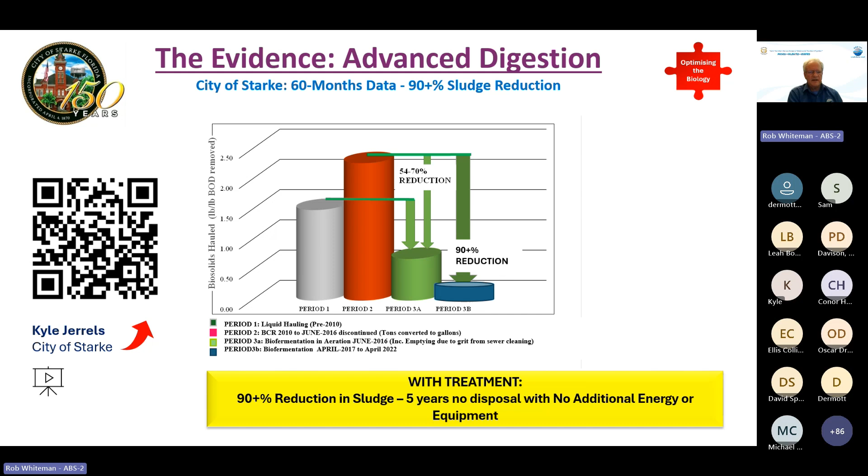We also looked at this option because in Florida, again, we require low pathogen sludges, preferably Class A sludges, and we were able to meet the low pathogen sludge requirements with low fecal coliform, salmonella, enteric virus, and helminth ova by using this advanced digestion process. And again, that's with no additional equipment, no additional energy.

As one lady asked me at the International Water Association conference in Beijing last year, what process did you use? I said, we didn't use a process, we used microbial population shift and probiotics. She looked very confused because she couldn't understand how we could eliminate pathogens through microbial population shifts without a sterilization process.

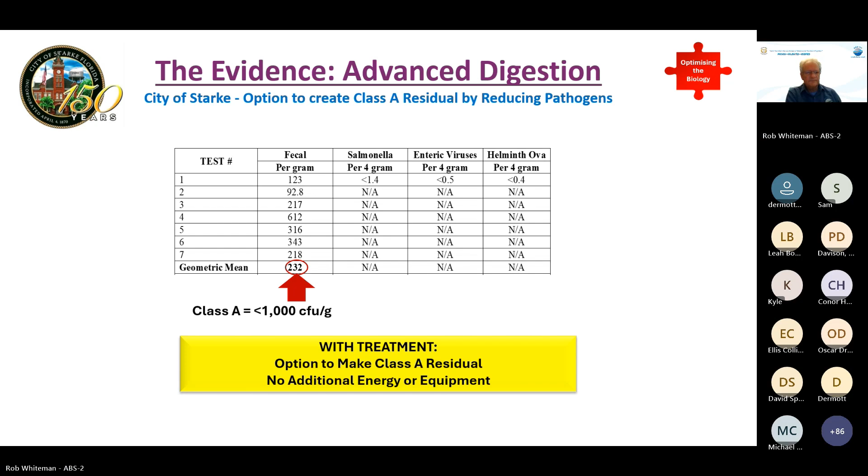So what does the technology do? Again, it's one technology providing multiple solutions. It improves plant performance, better settleability, hydraulic capacity, organic capacity, reduces sludge production, and advanced digestion can take that further to 90%.

It reduces your energy usage, carbon footprint, and provides the operator with much more control. In essence, without equipment, because ABS provides a full turnkey service, there are no dollars or pounds there. It reduces OPEX and can be self-financing, particularly if you compare it against the alternatives analysis, which is what we encourage companies to do. And lower energy requirements moves you towards a smaller carbon footprint.

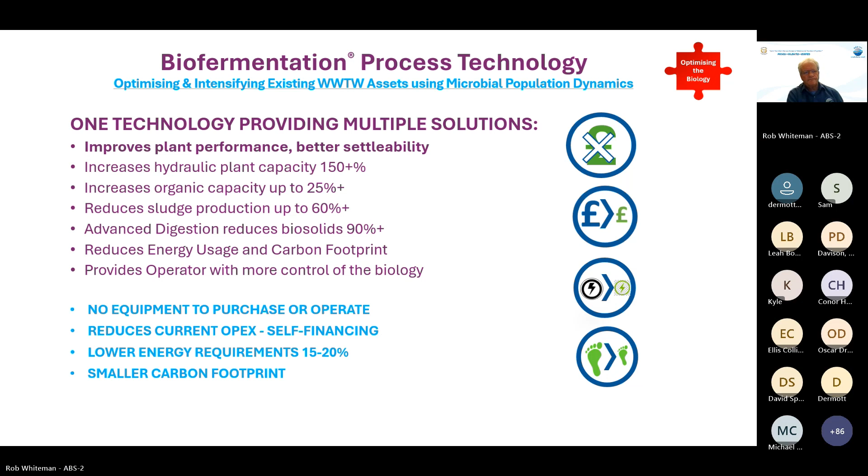At this point, I'll hand back to Leah and try not to press the wrong button. I won't do anything. Definitely don't press the stop sharing button. Thank you, Rob.

Thank you so much to all of our presenters so far for such an informative and open presentation. It's been really, really great.